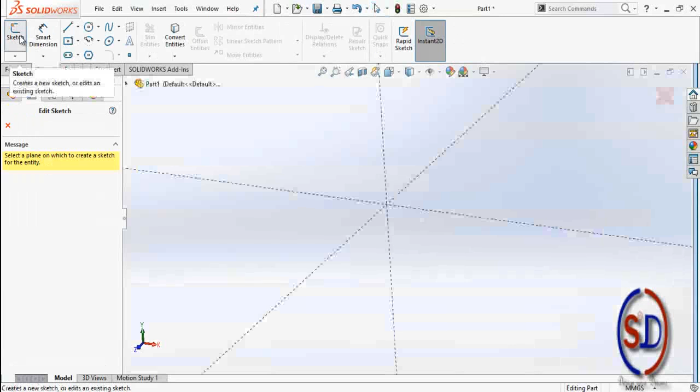So I'm going to sketch. Firstly, I'm going to sketch this hexagon. So I'm going to the sketch command and take the top plane. In the top plane I'm going to draw the hexagon by going to the polygon. The number of sides is 6, and the center of the polygon is at the origin. Just click over here and draw freely.

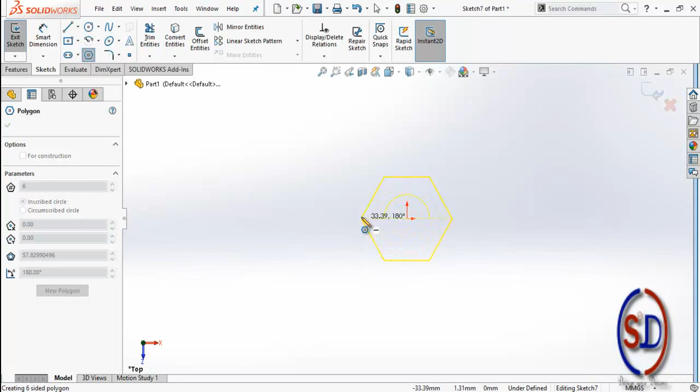As you see here, we know the dimension of this hexagon from this plane to this plane, and all the lines are equal size. So across the flats it is about 12 mm. If you know the distance from this point to this point, you can choose this one.

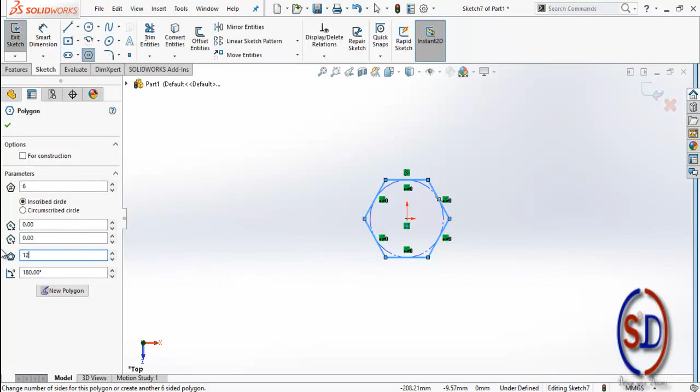Or if you know the distance from this line to this line, you can choose the inscribed circle. So I just choose this one, and the diameter of this circle is about 12 mm, which is the distance from this line to this line. So just okay.

Now I'm going to constrain it. Under the constraint it is showing here the equal sign constraint. I'm giving the dimension to this circle, 12 mm. Now you can see this circle is converted into black and this line is not black, so it means this circle is fully constrained, but this is not.

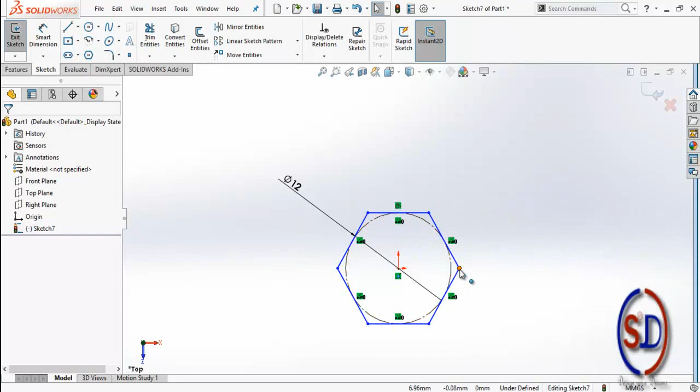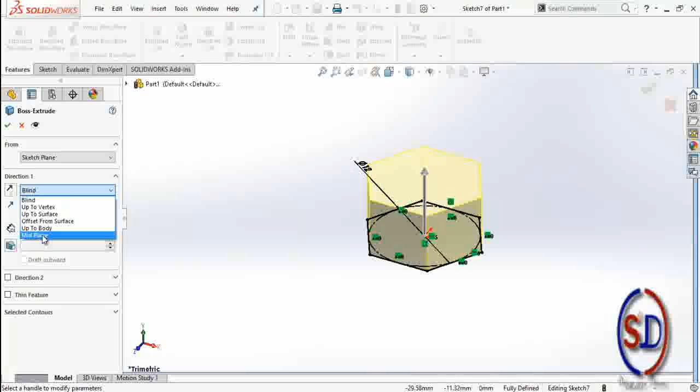So I've taken this point and this point with a horizontal constraint, and now it's converted fully black. So go into the features tool, into the extrude boss command. In the end condition I'm going to take the mid plane, so this sketch comes into the center and extrudes in both directions equally. 6.5 is the dimension of this thickness.

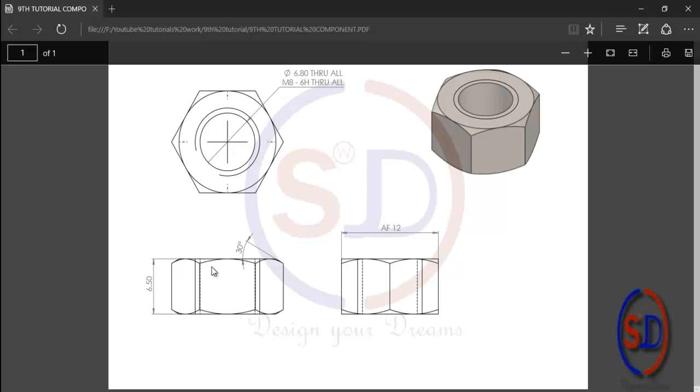Just okay. Now as you see in the top view, it is showing this circle, and if you see the front view, the outside of this circle will be cut down by a 30-degree angle. So firstly I'm going to draw the circle at this plane. So going to the normal of this plane.

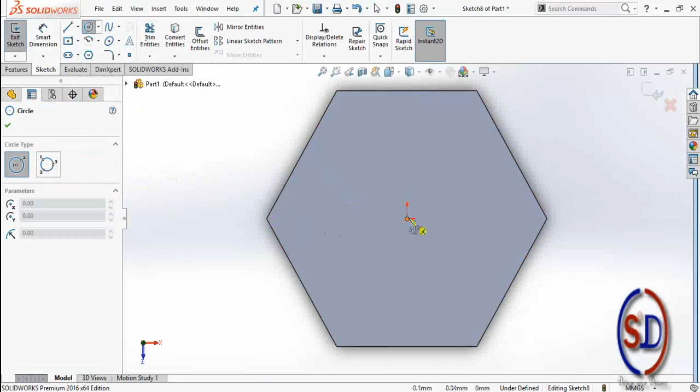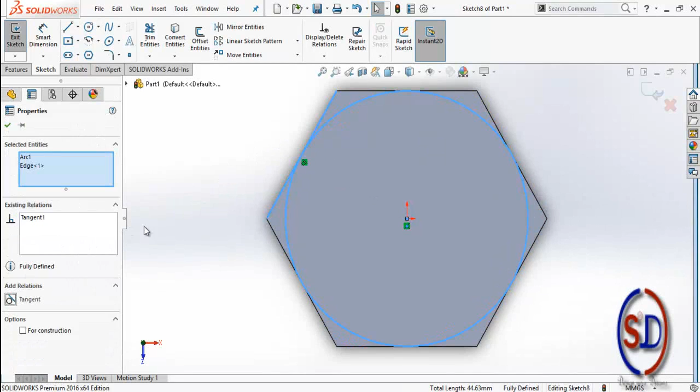Then I'm going to take the sketch and select the plane here, and draw the circle up to the tangent of this line, which is already shown here by this sign in a white box. But it is not converted fully black, so it is not tangent. So selecting both of them and constraining them by tangent. Now it's converted fully black.

Now I'm going to the extrude cut. Here we have to cut the outside of this circle, that is this portion. So you can choose this thin feature tool. This 5 mm represents the distance from this circle to this outer circle. It doesn't matter because we have to cut up to this point.

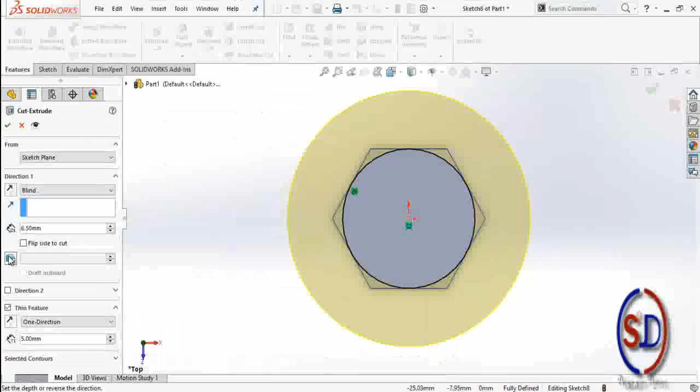The angle is 30 degrees from this surface. So for the vertical angle, we have to go to the draft and write it over here, 60 degrees. So you can see it from this portion. The other thing is okay.

So I already cut it over here, so now we have to place this at this plane also. So we can place here by mirror. As you see here, the mid plane is this, so you can mirror by this portion.

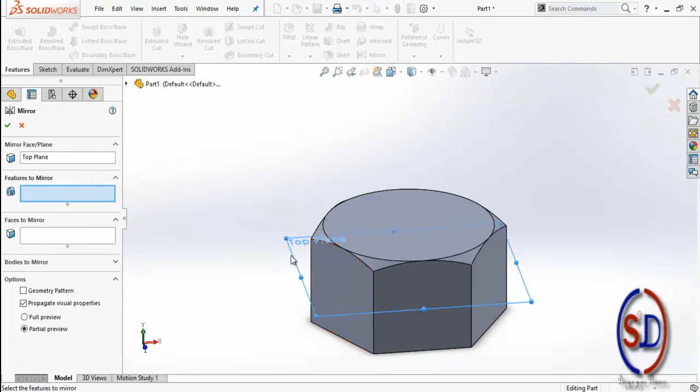So you can just go to mirror. The mirror face or mirror plane is about this, and the feature of mirror you can choose this one, and it will all. So now it is already plane mirror.

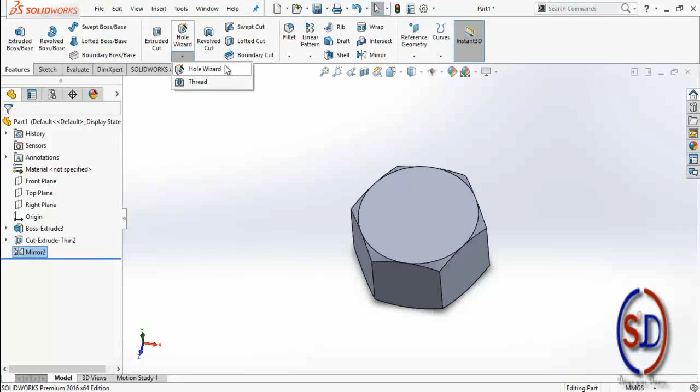So now I am going to the Hole Wizard features tool. As you see here in the arrow mark, if I just click over here, there are two options. First one is the Hole Wizard, second one is the threaded. Threaded represents that if we already drill over here, or if you already provide the hole over here, you just provide the thread on that hole. So you can choose this one, or if you have to drill or thread, you can choose the first one. So here you can apply any type.

As you see here, it is mentioned these are the types of holes. First one is a counter bore, second counter sink, and third one is drill. Here, if we go here, we find there is a type of this hole.

The first one is a dowel hole. Dowel hole is that hole which locates the two parts in our assembly. So in that case, we have to use this dowel hole, which is generally used for just locating the position of the part.

And the drill size, if you have to provide just drill over here, you can choose this one, if you have to provide the screw clearance. Screw clearance is generally provided when we join a minimum of 3 parts or more. So in the middle plate, the intermediate plate, you have to provide the screw clearance.

Or we have to provide over here a threaded hole. It is a tapping hole which is showing over here. As we know, if you are following another standard, like we are following DIN, the German standard, you can choose on that.

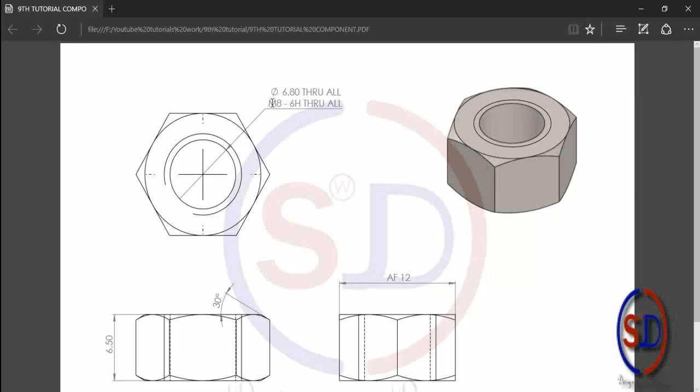And the types of hole, at the bottom there are many other types, so you can just do one of those. So we have to drill over here, that is M8, and 6.8 is the drill size, which as you see over here, the meaning of this sign represents that we have to drill firstly 6.8, then we have to tap M8.

So I'm choosing this one, going to like 12 over here. As you see here, it already shows M8, and here 0.25 is representing the pitch of this thread. So if you choose this one, the drill size is about 7.75 mm.

Or if you go this one, the drill size is about 7 mm, or if you go this only M8, the drill size is about 6.8 mm. As you see here, there is an option for which type of hole you can show. This represents only a drill hole, or this is representing drill with tapping. This dotted line is representing a tapping.

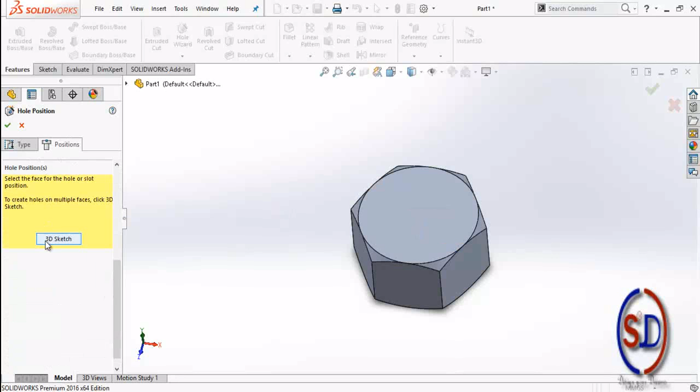So now, if you are going to the top view, you can find over here that this is representing a drill size, and this 3/4 circle is representing a tapping. This is a design representation. This 3/4 circle in outward direction is representing the inside thread, or if it is inside 3/4 circle, it is representing the outside thread. So this is a common thing.